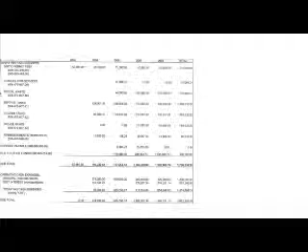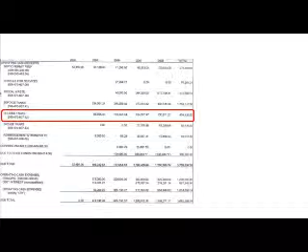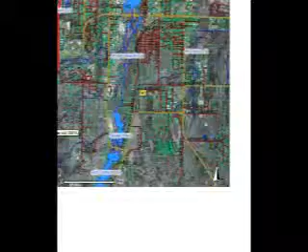The facility is located at the top of LaFranier Hill, right next door to the County Road Commission. The remainder of the video has to do with why the project was necessary and how the facility itself actually works.

I'm Fred Keeslar, Health Officer, Grand Traverse County Health Department. A little of the history behind the Septage plant was the need for one. Back in the 80s, early 90s, it was recognized that we were running out of places for disposal of septage, that is, the waste from septic tanks. Back at that time, the sewage treatment plant was discouraging the disposal of that waste because it could cause problems for the plant.

So they had gone to land application, that is, dumping the septage onto the land and then disking it in. A lot of people were concerned about that: the effect on the groundwater, runoff into surface bodies of water, and just a little bit of not in my backyard issue.

When there was application for a septage disposal site in the southern part of the county, there was quite an uproar of the community, the people not wanting it there. And when the townships banded together to discuss this issue of what to do with septage, the health department certainly supported the notion that there be a common place where the septage could be disposed of.

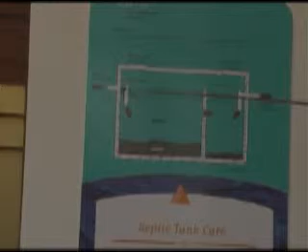The first diagram that we have shows a cross-section of a septic tank. If you look over here, you can see the waste that comes from the house, which is liquid and solid, comes into the system and deposits inside the tank. Over time, there's a separation between the solids and the liquids.

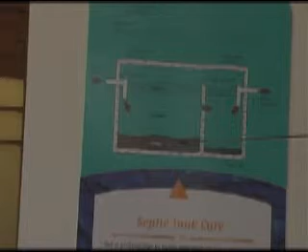The liquids have a tendency to flow through the system and flow out into essentially a drainage bed that's laid out in your yard. The remaining part, the sludge, stays in the bottom of the tank, and over time, the sludge will continue to build up.

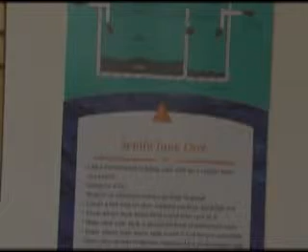What needs to happen every 3 to 5 years is that the homeowner should pump their tank. Pumping the tank removes the sludge from the system and makes sure the sludge doesn't go out into the drainage system. If the sludge goes out into the drainage system, it will plug up, and that usually means replacing the drainage system—the tile system that's out here.

When you do that, that's a fairly costly expense—you're looking at something in the range of $10,000. So certainly properly maintaining your septic system is vitally important if you're on one.

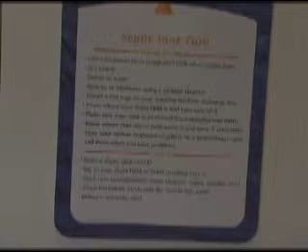Most people don't know that they're on a septic system. How do you find out? Essentially, wait for a sewer bill or call your township. If the township does not send you a sewer bill, then you are on a septic system.

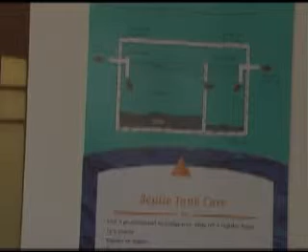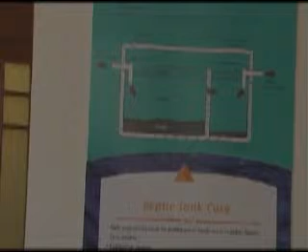It's important to find out where that particular system is located, so what you can do is contact the county where you reside and talk to the health office—they can provide you with a map of your home that determines where the septic system is in relation to your house. Once you find that, you can dig it out and pump it.

What about protecting our environment, this visual over here? The primary focus with the 5 townships we talked about—Acme, East Bay, Elmwood, and Peninsula Township—was to protect the environment and make sure the water in our area is clean. The wastewater system went through a $33 million upgrade, and in that process, we made sure we deposit the cleanest water possible out into West Bay.

The septage treatment facility in Grand Traverse County does essentially the same thing. It treats water to a very high quality level, and when it discharges water, it's exceptionally clean, making sure our environment stays very clear and clean.

Now, are those two plants connected? Yes. The septic treatment facility, when it discharges, it will discharge out of this building into a tank out here, and eventually that tank will discharge down a sewer line. When it discharges down that sewer line, it eventually goes to the city wastewater treatment plant, and that city wastewater treatment plant ultimately discharges out into West Bay.

Okay, what's this on the bottom? This is a picture of what the standard was before we built our septic treatment facility. Basically, a hauler would drive out into a field somewhere, open up the valve in the back of the truck, and let whatever is in his tank fall out onto the ground. Are we running out of land, or what happened?

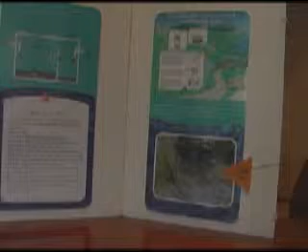Yes, we were running out of locations to do this, so Grand Traverse County and the 5 townships looked at building this facility to address the space issue, and also because there were problems with the methodology and how the waste was being applied to land. There were situations where it was applied in the wintertime on frozen ground. There were situations where it was not properly plowed into the field, or it was not applied at a proper agricultural rate.

In those situations, it overloaded the soil. It allowed this waste to disperse and spread across the land. And it was common for somebody's Labrador Retriever or other dog to go out and roll in it and come back into a house. So, wasn't a clean situation?

No, it was an extremely dirty situation, and the solution for Grand Traverse County was to build the septic treatment facility and provide the cleanest treatment that we can provide, and also make sure that we keep the water as clean as we can, because we realize that clean water is a big part of our community, and it's a big part of our future economically as well as socially.

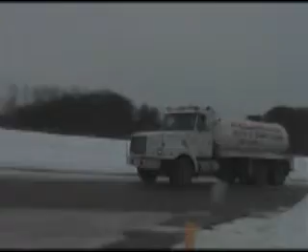Okay, we're in the parking lot of the septage facility now. Pretty straightforward industrial style building. Well, Chris, we just had a truck pull in. Can we go take a look at it? Okay, so the trucks pull straight in and... Yes. We have a card that will access a panel to open up the garage door. So it's all automated then, huh?

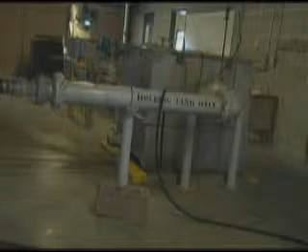Yeah. Then everything will start flowing through the system. Okay, now this is a big holding tank. I'll let Scott explain this. Okay, so basically the septic tank is what you showed us in the office. Yes. That's different than a holding tank, right?

Yes. A septic tank has a tank, and it also has a drain field. A holding tank is just a tank in the ground, no drain field. There's no place for it to drain out in somebody's yard. So the holding tank, 5 or 10 times a year you got to pump it. Where a septic tank every 3 to 5 years. Yes. Septic tank you pump every 3 to 5 years. Holding tank, depending on usage, could get pumped every month.

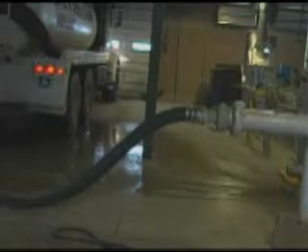Okay, so if somebody's buying a house, they need to pay attention to whether it's a holding tank or a septic tank. If you're buying a house, you need to look at how low the ground is in relation to a body of water. If you're living next to a stream, a lake, a pond or swamp, you might have a holding tank. It's even possible to have a holding tank in very high ground, just depending on how poor the soils are for drainage.

So one of the more important things to do when you're looking at a home is to go to the health department and find out whether they're connected to the sewer or they have a septic tank or holding tank. Okay, great. By the way, your name? Ken Stawowy. Ken Stawowy. Okay.

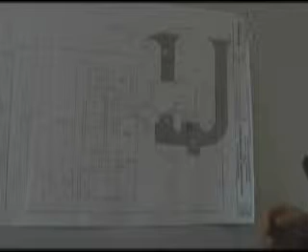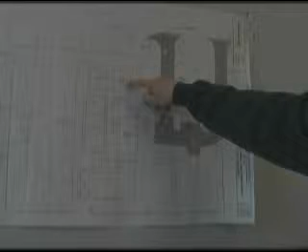Tell me, what happens with the sewage from the time the trucks show up at the facility to when it leaves the facility? Okay. First of all, the material is unloaded in this building here, in one of 2 unloading bays. From here, it travels to our influent equalization tank, where it sits and waits to be processed. When the process calls for it, it's pumped from the equalization tank to this building here, to a fine screening system, and then from this building, it's pumped to our aeration tank.

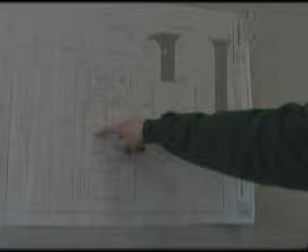The aeration tank is where the bulk of the treatment happens. From here, it splits into 2 different directions. The clean water goes out through the membranes and into our post-equalization tank, and then eventually out into the sewer and down to the main sewer treatment plant.

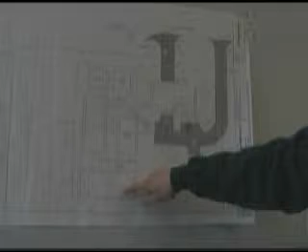The other direction that it goes, the sludge that's created in the treatment process comes back to this building, gets dewatered, and then goes to the ATAD for solids treatment. What's an ATAD? The ATAD stands for Autothermal Thermophilic Aerobic Digester. It basically cooks the sludge, the biological processes.

So you're trying to create something useful out of the sludge then? Well, creating something useful is an interesting side effect of it. The main purpose of it is to destroy pathogens and harmful bacteria that are still present in the sludge. Okay, so basically that ugly-looking septage that we saw coming in gets cleaned up. Yes. At the end of the process.

Okay, anything else? Well, without going into too much detail, no. I'm actually recording right now, but what did you say about the Bay Harbor? You may not be able to be with us for the whole tour.

Bay Harbor, you're sampling a truck? Yeah, we get loads of the water from Bay Harbor every day, and once a month I collect a composite sample from those loads and do an analysis on it. Okay, well, what's Bay Harbor? Bay Harbor is the leachate that CMS Energy is collecting in Petoskey, part of that cleanup. Okay, so there was a groundwater contamination, and you're taking the water from that?

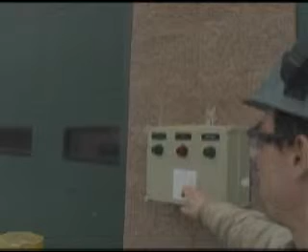Let's go. And they got to swipe a card to get in? They do. Each driver is issued an ID card identifying them not only with the company that they haul for, but that specific driver. And when they come in, they have to come up to this card reader system and touch their card to this plate. Inside, there is a sensor that can read the information on their card and can identify them to the computer.

When they do that, then they get a choice between which side they want to pull in on. It'll light up, and then they just have to hit the button, and the door will open for them. Okay, good. From this point, when the drivers come in, they would pull in and put their nose up against the front door. You got a video of that? Yep. And then they would hook the hose up.

They'd come over here, touch the screen, and they could interact with the computer through this screen. After they swipe their card, different information will pop up. They confirm who they are, and they enter a PIN number identifying that specific card and that specific driver as well. And then is it holding tank material or septage material? Right, the computer will prompt them, ask them all those questions, and then they can tell the computer what they have. Okay, great.

When they're ready, they can start. The computer will release a valve in this pipe and allow the material to start flowing through the system. The material comes through this pipe here. Yep, through there, and into here, the rock trap there. It's a rock trap. And then after the rock trap, it goes through.

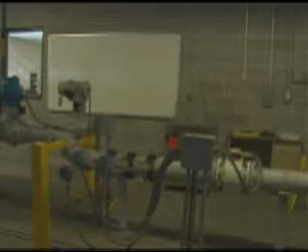There's our monitoring equipment, the little ring with the red top. That's called a mag meter or a magnetic flow meter. That measures the speed and helps to totalize the amount of gallons unloaded. And then those three things are probes that measure ORP, pH, and conductivity, three properties that we monitor.

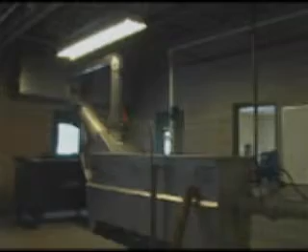You're doing chemical testing at that point? We're monitoring some of the properties of the material that's being unloaded. Okay, good. And then after it runs by there, it drops into the coarse screen. That coarse screen removes all the material in the water that is larger than 1/4 of an inch.

Okay. Cool. From there, all the junk that it removes obviously falls into the dumpster. Everything else goes through a pipe that's on the bottom of the screen and flows down to the influent tank. The material will come underground from that building into the east half, or the right half, of this tank. Our influent tank and effluent tank actually share a wall, and they're both underground. But the right-hand side of this tank, pretty much from that little blue structure over, is the influent side of this tank.

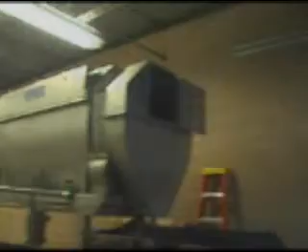That's where it sits and just kind of bubbles until the pumps call for it, or until the process calls for it, and then it's pumped down under the ground here into the building behind us. The pipe there in the back, if you can see past there, is where the material comes in from the influent equalization tank. That brown pipe, and it comes in and is divided between these two screens.

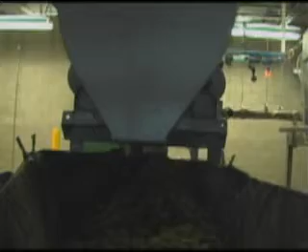Yes. Okay, very good. After the screens, the pipes on the very bottom, that's where all the water that makes it through the screens goes, and it drops into a lift station on the back side of the plant. At this point I would call the material fine screen filtrate, or screened influent, because all of that material has been removed to a certain size. Yeah, let's go this way. I don't need to show you the lift station.

That tank right there, the white half of the building. That is the side of the aeration tank. Okay, so where it begins white is your aeration tank. Yeah, that's where the fine screen filtrate, or the screened influent, gets pumped into that tank with the population of biology that we have in there to do the treatment.

So you mix the air with the bugs in that tank. Yes. Aeration, bacteria. Okay. Good. And in that environment, the biology that lives in that tank does all the treatment for us. Okay. Very good.

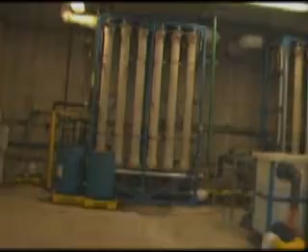As a neat aside, the biology that grows in that tank is not anything that we had to buy or supplement from anywhere else. It's not specially manufactured. It's biology that's already present in wastewater. We just had to provide the right conditions for that biology to flourish.

This is an impressive room. This room is one of the reasons why I have hearing protection. Okay. Yeah.

So where does the effluent come into this room? The material that's in the aeration basin, you can't really see it, it's behind one of those blue barrels. But it comes in at the bottom of this structure here, flows up into that header system, and then goes up those six pipes. It's inside those 6 white pipes where the membranes exist.

They're actually shaped more like great big straws, almost like a McDonald's straw. The material that's in the aeration basin goes through the center of those straws, and then the clean water falls out through the pores of those membranes. Okay, so are both of these sets of pipes doing the same thing? Yes. Just one is doing it for the east half of the tank, and the other for the west half of the tank.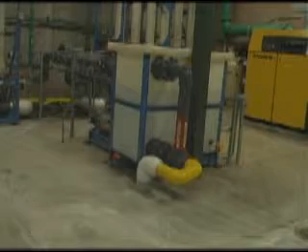Okay, and what's this thing in the middle here? The box in the middle is our permeate box. See the gray pipes there, that's the permeate coming off. That's the clean water being collected, falling out of the membranes. It just collects in this box briefly before it falls through another pipe and goes out to the post-EQ tank.

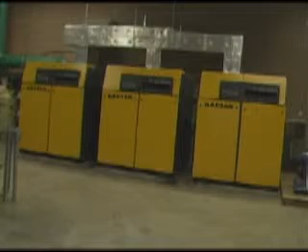Okay, and what are these big things over here? Those are the blowers that provide the air and mixing for the MBR tanks. And to get the bugs to grow, you gotta add air then, right? Right. To provide the kind of biology that we want, they're aerobic biology, so we have to provide them with air. Okay. And what's this over here? It looks like a big power supply.

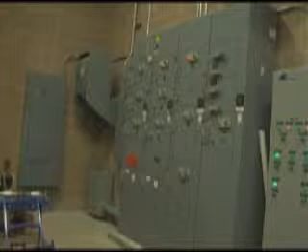This is actually depending on which part you're talking about, but that panel there, the MCC panel, MCC stands for Motor Control Center, and that's where all the power for each of the pieces of equipment in this room runs through that panel.

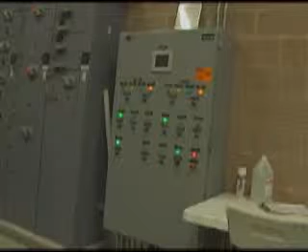Okay, and then what's this panel on the right here? What's this? That is the control panel. That's the control panel, and that is where, if we wanted to manually manipulate any valves or any processes, we could do it from there. We can start the process from there. It's where the process takes its cues from the programming in the computers and the electronics in that panel.

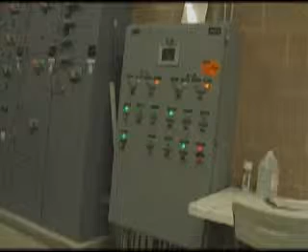Okay, so but the computers run this. It's the exception when you have to use this here. Some parts of this process are not totally automated. So some parts of it I have to come out and physically start and physically manipulate. Others are automated, and I just have to tell them to start.

Okay, we're going over to the ATAD. And what does the ATAD mean again? Autothermal thermophilic aerobic digester. So if you break it apart, autothermal means that it generates its own heat. Thermophilic is a general type of biology that means that the biology that operates inside that tank likes heat, specifically heat of around 130 degrees Fahrenheit or more.

Aerobic means that it's a process that is in the presence of air, and then a digester just talks about the fact that it breaks down biology and helps to stabilize the sludge. Okay.

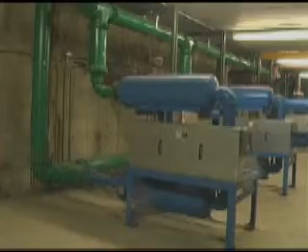This is the upper half of the ATAD, called our blower room. These 6 blue units here provide air for the various parts of the ATAD. The first 2 provide the air for what we call the reaction tank, which is where all that digestion that I was talking about, the pathogen reduction, happens; the air for that particular tank comes from these 2 blowers. Okay.

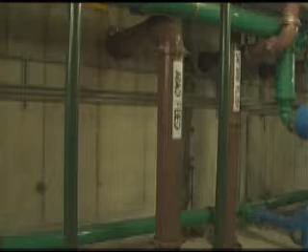The second 2 blowers provide air for the second tank in here. There's actually 3 tanks involved in this whole process. The middle tank in the process is just a holding tank, much like how the influent tank holds material until the rest of the process needs it.

Our day tank, it's called, just holds sludge and grease until the ATAD wants it, or until the reaction tank wants it. After the reaction tank is done treating the material, it goes to the third tank, the storage tank, and these last 2 blowers provide air to that storage tank.

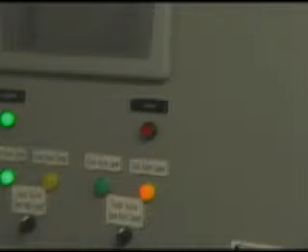This is where all the brains of the ATAD are kept. The computers that monitor how quickly the pumps are running, and the sensors that are monitoring the different processes, they all come through and are housed in this room. What's this up here? These are VFD readouts. VFD stands for a variable frequency drive.

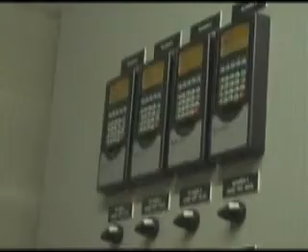One way to help save power and wear and tear on equipment is to modify how hard it's working. Like the pumps, for example, don't always need to be running full out as hard as they can. And so at times, when the correct signals come from the probes and sensors that we have in place, when those sensors tell us that treatment is basically done, then the computers can tell the pumps, okay, we don't need to run as hard as we were, and so these VFDs will ramp down how hard those pumps are pumping.

Downstairs is where the pumps are that do the various tasks that we need in this process. They're mostly just mix pumps because, as I said, the mixing is a very important part of treatment. You have to have a uniform environment in the tank so that the biology can act in the same way in all parts of the tank. And it's really loud down here. Really loud. Okay.

You can get a good overview from the stairs if you like, or we can get right down on the floor. What am I looking at here? You're looking at the mix pumps. This is the ATAD's mix pump, the reaction tank mix pump. It's a 100 horsepower pump. It can move the water and sludge in that reaction tank very fast.

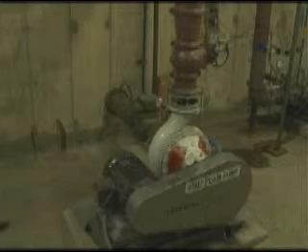Okay. And what about this foam pump? What's that do? Part of the mixing and the treatment of breaking down the biology in the reaction tank creates a foam. And if we just let it go unchecked, it would bubble up out of the top of the tank and make an enormous mess. So you're pumping the foam off with this pump?

Actually, what this pump does is that it pulls sludge exactly in the same way that the mix pump does, except instead of injecting it right back into the tank for mixing, the foam pump sends it to the top of the tank to some nozzles and blows the liquid back down on top of the foam to break the foam up. What's this do over here? The blue pump there is actually the day tank pump, and that is pumping right now.

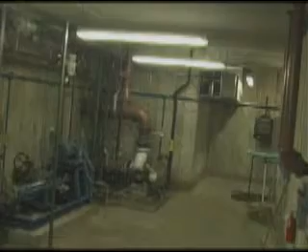That is pumping material from that day tank, that holding tank, into the reaction tank for new treatment. And then that final pump on the far side is the storage tank's mix pump, where the storage tank has the sludge that's already been treated; it's just turning it over, keeping the biology moving, and there actually is a little bit more treatment that happens in that storage tank. But it's pretty much a wrap when it goes through this brown pump then.

What's that? It's pretty much a wrap when it goes through the brown pump. Yeah, when it goes through that fourth pump over there, it's pretty much done. Well, thanks a lot, Ken. Is there anything else that we haven't covered here?

The only other thing that we haven't talked about is the odor control system that we have. It's actually a very sophisticated system. It's also one of the reasons why we weren't able to actually look at any of the sludges, because they're all in enclosed tanks, and the foul air fans draw the foul air off of those tanks, and it pulls it all through ductwork throughout the whole plant. Sometimes above ground, sometimes below.

The black pipes we were looking at out there, those are all odor control pipes, and it draws it all into a biomedia made of wood chips, and the moisture in the air helps to grow a culture of bacteria in those wood chips that helps to treat the foul air and remove the foul parts of it. So we're in an industrial park on a ridge, basically, so there really isn't much trouble coming off of this plant then for anybody, huh?

No, to my knowledge, I don't think we've ever gotten an odor complaint out here. Not one that anybody's told us about. We can tell, or at least I can, different ways of knowing whether or not we're removing all of the foul air. Like I said, I can detect a smell sometimes. It's like a dry, musty smell, and that can usually tell me that we're not getting all the foul air removed, and I might have to increase the fan speeds.